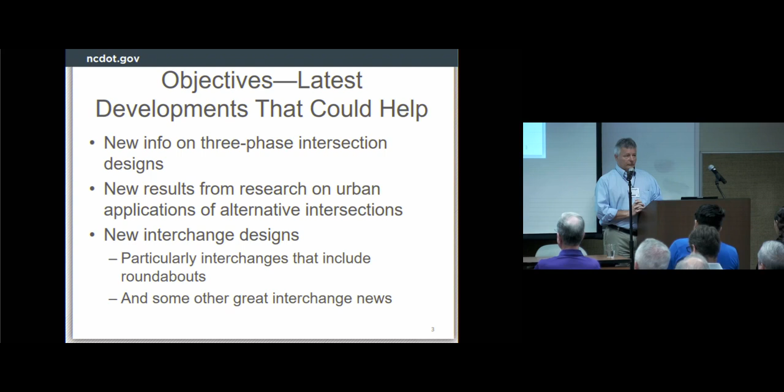And then the third thing to kind of round things out for my time here today is new interchange designs that we keep developing, and some new ones that emerged within the last year that could help us. So that's where we're headed.

So on the business of three-phase intersections, let me be clear, the two-phase is best, right? If we can get the RCI in place, that's almost always the best solution. I say here safety and signal progression, but of course just raw capacity through the intersection. RCI kind of strips out all the other movement, all the other stuff, and gets you down to the essence of that direction meets that direction, and how can we move as many vehicles as possible through a space.

Whatever you call it, goes by many different names, but yeah, RCI is the top of the heap. Median U-turn, a close cousin to the RCI, adds in the outstanding service for pedestrian and bicycle. RCI is, at least on the bicycle side, more debatable, but median U-turn is superb in those aspects, and has shown a terrific safety record too. And then where you really need capacity, you have to stay at grade, but you really need capacity. That CFI, the continuous flow intersection, is there in the menu too.

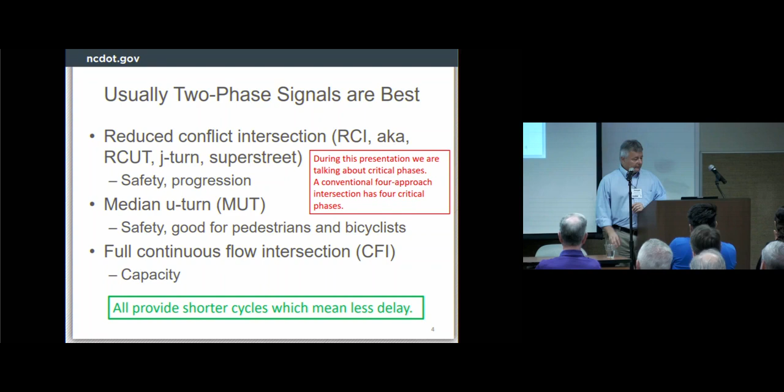So nothing I'm saying here is meant to undercut those kind of three fundamental two-phase designs. Those are the ones that most of us and most of our projects should be striving for. For safety, capacity, pedestrian, other aspects, it's going to be the optimum. But sometimes they just won't let us, right? There's just constraints. And you all have encountered those, and I have too.

The public opinion, the media, yes, our political leaders, just won't let us get that thing, what we consider to be the best thing in place. And then sometimes it's the lack of precedent as well. That median U-turn, we've only got 3 in the state right now. So, most everywhere you're thinking about one, it's going to be the first one in that county. And that's tough. Our RCI, we've got 400 in the state now, so we've got pretty good precedent there. That's not as much the problem anymore. But CFI, we've got a grand total of 1 open in North Carolina. So that is a drawback as well. That hurts us. So sometimes they just won't let us do that thing.

And so we look around for other solutions. Play the good cop, and you know, I even hesitated to put the word compromise on the slide there, but that is kind of what it is. If I was in charge, we'd get the RCI. I'm not in charge, I don't want to be in charge. So, okay, what's the next best thing that'll still accomplish our objectives, and some of these three-phase designs are that. They would fit.

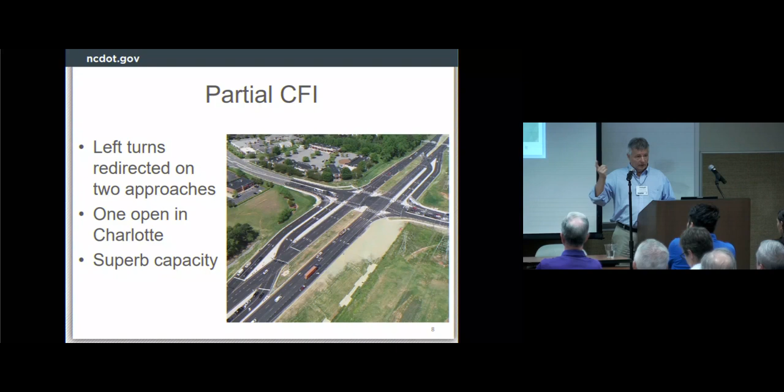So the full CFI version has 4 left-turn crossovers. That's going to be very rare and special, I think - I think there's only one of those in the U.S. Most of them that we'll see will be this partial version with 2 of the crossovers, leading to a signal at the main intersection with then 3 critical signal phases.

And then there's this neat little thing, a combination of a CFI and a median U-turn. Let's call northbound going up the slide here. The northbound lefts get to cross over to the other side of the road like a CFI. The southbound lefts get to come through the intersection and then make a U-turn like a median U-turn design. So we get rid of a phase at the main signal - we're down to three critical phases, and we get to keep all of the impacts on one side of the intersection. That should lead to pretty significant cost and impact savings with traffic movement that's pretty darn close to that previous slide with the partial CFI.

That was a big outcome of the research here, showing that this thing is almost as good from a traffic perspective as the one on the previous slide.

Yeah, we're going to need help from our signing heroes here to get people to drive it correctly. And like the other CFI, there's going to be a possibility of violations and wrong way movements. None of these solutions is perfect, right? But this thing has potential.

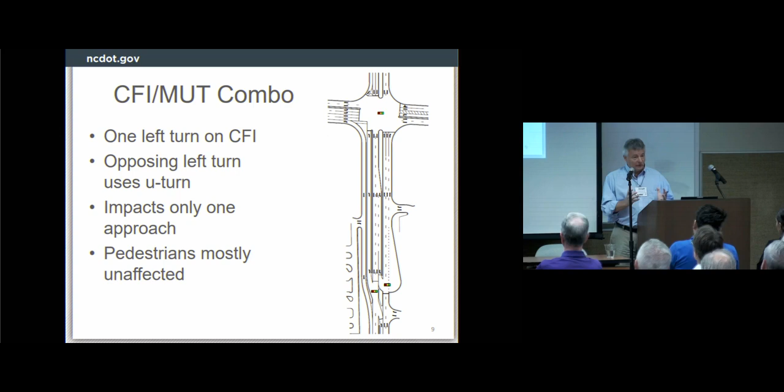We had 2 of these in the planning stages around North Carolina at one time. Both of those projects unfortunately got canceled. So I'm looking for candidates - somebody got a good project out there. This one should be good for pedestrians as well. One of the projects that got canceled was really in a pedestrian-friendly area with so much vehicle demand and pedestrians, and I really thought this one had a chance to help in that situation. So I'm kind of looking around for other places where this could go.

The researchers really liked the idea of the partial median U-turns. There's I think at least 3 different varieties of partial median U-turn - maybe that previous slide, if you call it a 4th one then. The idea here is you're really only redirecting 2 of the left turns instead of all 4. In this case, if the minor street is the north-south street, you're allowing the left turn direct from the minor street, but if you're on the major street and want to make a left turn, you have to go through the main intersection and then U-turn and come back through. So at the main intersection, you're down to a 3-phase signal.

But what they found, especially from their simulations, was there's some circumstances where this thing actually provides you more capacity than the full median U-turn. That circumstance was where the capacity constraint was here. And it's not difficult to find demand patterns, turning movement patterns, where that would be the case, that the capacity constraint with the full median U-turn is actually at the crossover.

If you have one of those, take some demand off of the crossover, and almost like for free, we get extra capacity. Very little extra pavement, really no extra space, and we free up capacity in some of those circumstances.

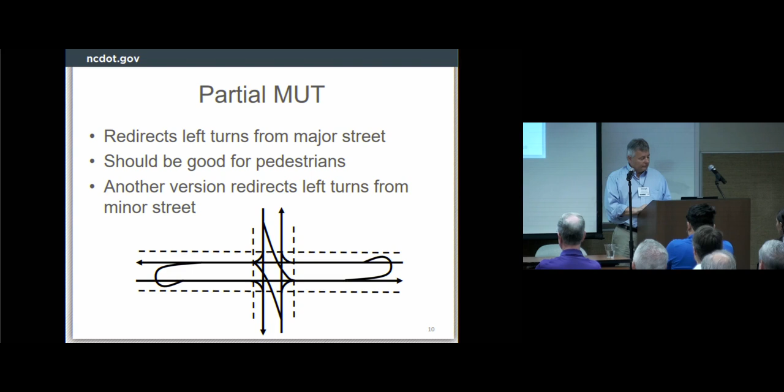Basically the minor, one of the legs of the minor street is right turn only. So we're redirecting the left and through from one of the legs of the minor street.

Interesting. That means I just need one U-turn crossover and one bulb out. My design just got easier by half, right? Because in these RCI median U-turn type of projects, finding room for the crossover and the bulb out is the whole ball game.

Just talking about that over breakfast with one of our colleagues here on one of our projects. Where do we have room for crossover? Where do we have room for bulb out? Well, the problem gets easier if you only need one instead of two.

Like all of these, it's not everywhere. It's, again, a potential compromise. The RCI beats this one in all dimensions, but for a place where they won't let us do the RCI, I think in this particular case it's a developer adding that fourth leg.

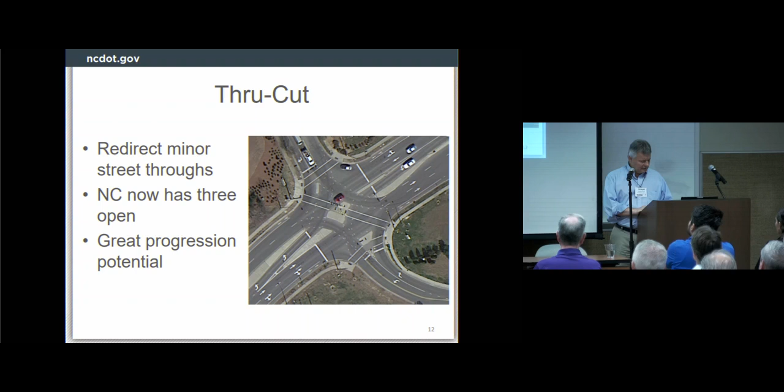So one of the ways to fix that is to offset the two minor street legs. Basically the same operation, the same three-phase signal, but now you got a straight across pedestrian movement. If you do the math on this, it really doesn't save much time for pedestrians, but it sure looks better, doesn't it? And to the extent that we are in the perception business...

I'd rather take this one out to the public meeting. Let's put it that way.

So simulation results that our researchers came up with. You see there are three measures: travel time, queue length, and stops per vehicle. These are averages over many simulation runs, different combinations of demands and such.

The V over C of 0.9 tells you it's a pretty full intersection. We're not simulating 3 a.m. here. This is more like 4 p.m. Typical demands for North Carolina.

Everything beats the conventional. It always will. Get rid of a phase, and that's what you get.

The RCI remains kind of the leader in the clubhouse, but these other designs are pretty darn competitive with RCI in reducing those travel times and queues especially.

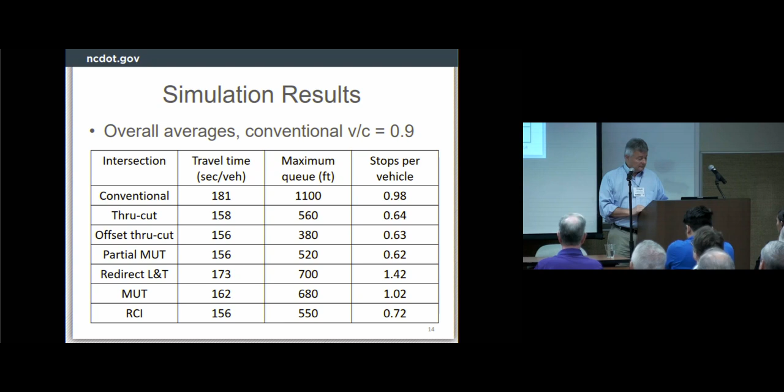More simulation results. These are from a program called SSAM that dives in and analyzes in detail the simulation vehicle trajectories. You can see here rear-end conflicts that they were able to count, lane change conflicts that they were able to count, and we're pretty much beating the conventional with most of these alternatives as well.

So these are definitely surrogates. We need to get some of these built, and we need to measure the crashes and get real crash data.

We do have crash data from a couple of the thru-cut sites. Two of our three in North Carolina have been open long enough, and the crash data look very promising. They're coming in very well.

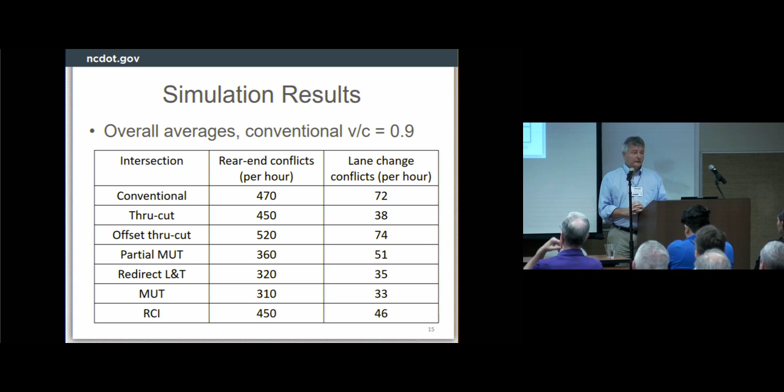We need crash data from some of these other options, but the indications are once we get the safety data that they'll come in like we expect. They'll be safer too.

Okay, and then they ran some case studies. I picked this one out, maybe not representative. This is a terrible intersection, some of you know, in North Raleigh, US 1 Capital Boulevard. The last signal before you get to 540, of course, the signal next to a freeway interchange is always a problem everywhere in the universe, but especially along Capital Boulevard in North Raleigh.

So if we were able to do a project now, the city of Raleigh or MPO or somebody's got a plan to eventually put Capital Boulevard in a trench and remove the intersection altogether. Fantastic. But in the meantime, until that thing gets funded and constructed, if we could somehow get a partial CFI or one of those CFI median U-turn options in place, with the same number of lanes here, you could see we could move traffic a heck of a lot better.

So, you know, maybe as an interim solution in places like this, or as an ultimate solution perhaps, something like a partial CFI or CFI median U-turn combination at a place like this.

Another one that they looked at on the west side of town in Cary, NC 55. I like to pick on NC 55. I think it was the last conventional arterial that NCDOT ever built. The minute it opened, it got over capacity, and you know, it's just a shame. We should have, in my opinion, we should have done better with that kind of last generation of widening projects.

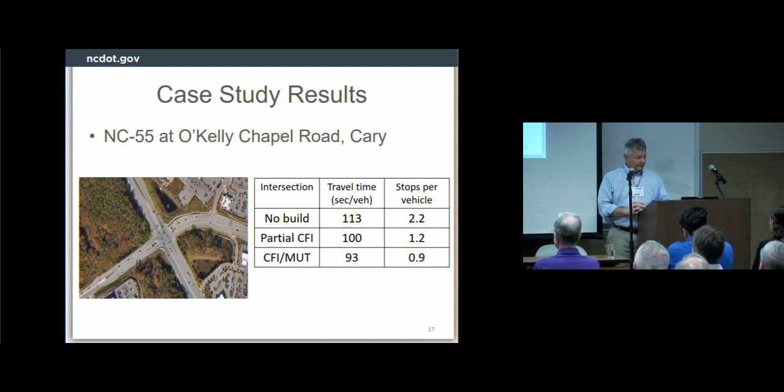Okay, so that's our story on the three-phase intersections. The research report went into a lot more detail, several more variations, but it's good stuff. If you're on a project and get a chance, look for one of those compromises, we have some out there. There's potential. You don't have to settle for the conventional four-phase.

All right, so let's talk about the urban applications a bit. To this point, most of our 400 RCIs around the state are rural and ex-urban. Fantastic. We put them in where we can. We should keep doing that. They've delivered fantastic, especially safety, results.

But the thought has always been there of, hey, maybe, why not? Could we sneak some into urban areas as well? Help our pedestrians, help our signals, get signal progression along our urban arterials. But the twist there that I think we should emphasize more is with progression, you get the chance to control speeds. So there's a safety benefit there that I think we are leaving on the table. We're not pushing that nearly as well as we could be, as we should be. We get safety because of the median, fewer conflicts and chances to get hit, and then lower delays as well. So all kinds of potential good things there if we can get some of these in place.

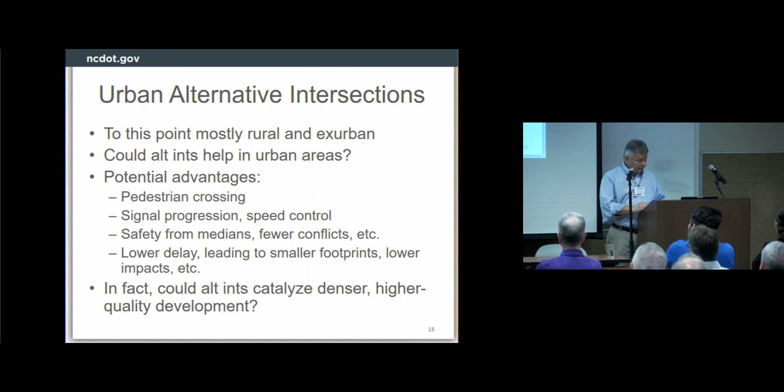The research team, my question to them was, can you help us get some of these in place? They took it further and said, in a more aggressive way, can we use these alternative intersections as a catalyst to reinvent neighborhoods? Especially they were thinking about failing shopping centers and failing malls. You know them out there, I know them out there. We don't have to drive far, like the Kmart just up the street here, right? How do you reinvent places like that? Could our street design actually help us create desirable real estate out of those failing places?

So the project was funded by us, and then NSF actually chipped in as well, which we appreciate. Chris Cunningham was the PI, and they had good help from a couple other co-PIs there. The report is posted on our website by now, so you can easily download it. They did focus groups, they did case studies, they did simulations, and probably, in my opinion, the best thing they did for us, a lot of pretty drawings.

That is not a skill that I have, right? You could tell I work for a public agency by the quality of my graphics. But these guys, they gave us some graphics we'll be able to use, I think, on projects that come out there. Their overall conclusion was the right type of design in the right place could be great, could not only solve our traffic problems, but had a chance to really be a catalyst to build back a failing urban neighborhood.

So they focused on three concepts. A lot of these are pictures from Greenville, which was one of their case studies. I want to emphasize to everybody that Greenville helped us, participated with us, but there's nothing official about any of this. This is not a plan of the city of Greenville or the MPO or anybody else. This is purely research ideas. For instance, at one point we'll show a road going right through their mall. NCDOT is not endorsing the buying and the tearing down of that mall. So let's make that clear.

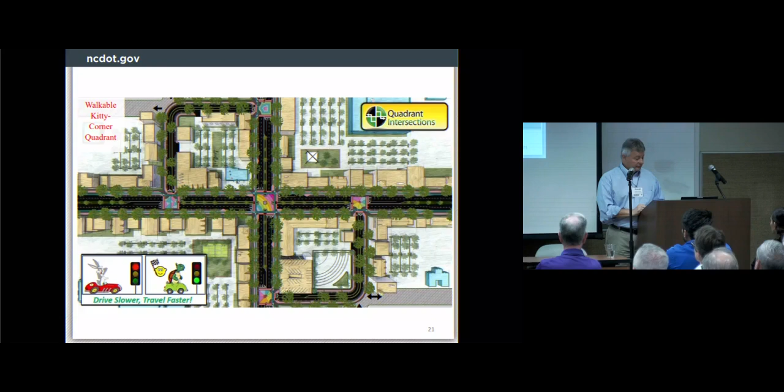If you manage this type of development, you are replacing 350 acres of development that occurs out in the ex-urban areas. And how much extra infrastructure, from our point of view as a public agency, do we not have to provide for that extra 350 acres out there in the suburbs? That, to me, was an eye-opening stat that they provided.

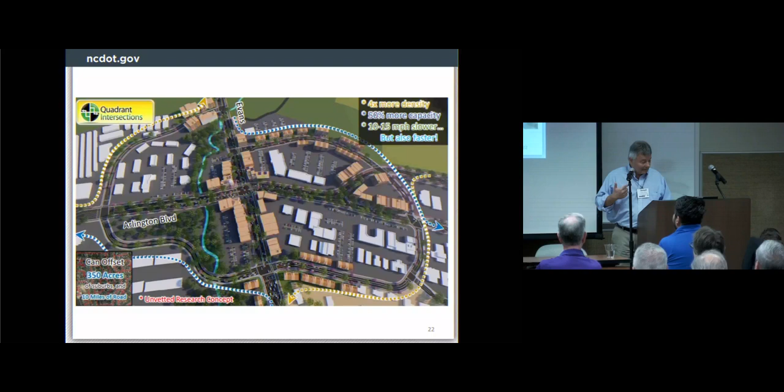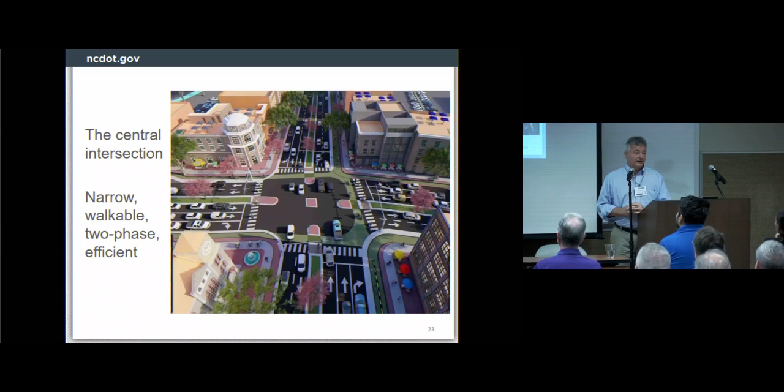I like it. All right, here's another look at that central intersection. Again, get rid of the left turns, walkable, bikeable, and then hopefully the developers notice that and come in behind with some awesome dense development.

Another look at a similar idea here, but this one, instead of the quadrant connectors, you're getting the U-turn ideas. Can you sneak in those bulb outs? They're not really bulb outs anymore. You can see the idea they came up with is sort of widen the median, get your U-turn in place, and then narrow the median back down.

They point out, it was an obvious point, but I'm glad they did it, and we should all keep it in mind: not every crossover has to be 90-foot diameter to accommodate every large truck that shows up, right? You can mix in different types of crossovers, and as long as we provide good enough truck crossovers down the arterial, that will still be okay in that dimension.

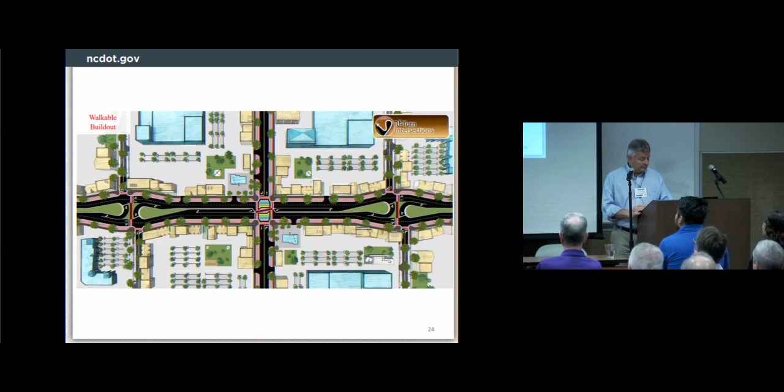So again, Greenville here, I think a different part of the city, offsetting 680 acres of suburban development out in the exurbs. So anybody caring about environmental issues, this should be wave the flag on this one - your runoff, your global warming type of thing. Oh, and by the way, 19 miles of road that we don't have to build out in the suburbs of Greenville. So that's what we're aiming for.

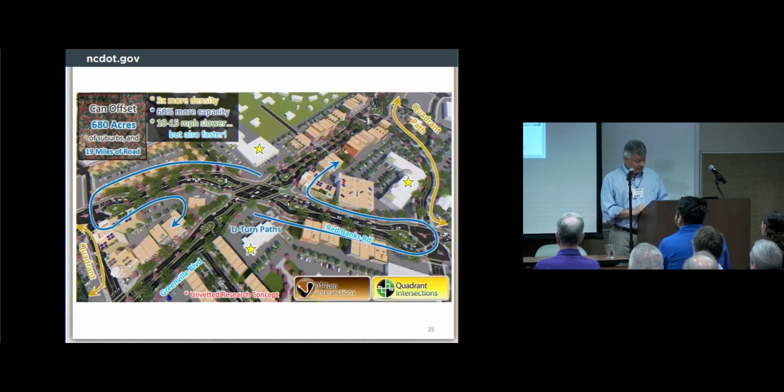Again, these guys went way beyond what I was hoping for with this research. More other looks at what they were working on, what they were envisioning here.

Of course, continuous medians - safer, encourage right-in, right-out from driveways and side streets. On-street parking, that's a luxury. I could have maybe quibbled with them a little bit about that. They thought it was a nice feature. I don't know.

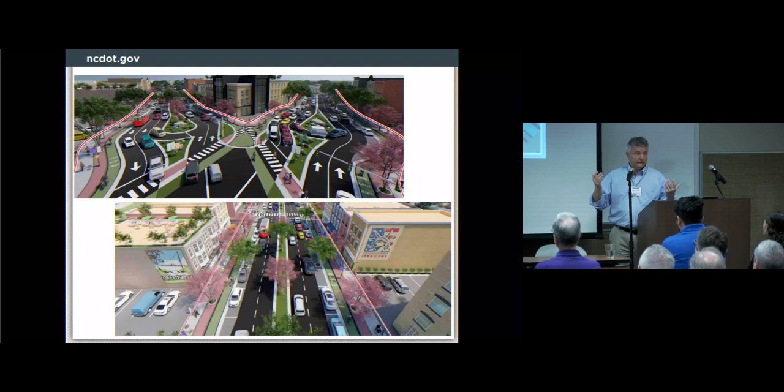Crosswalks everywhere to keep the walkable theme. As long as you got the median in place and you've got good signal progression, a two-stage crosswalk is a freebie. So let's sprinkle them out there everywhere.

And then finally, the one-way, or what other literature calls a split intersection. I think this picture is actually from Smithfield - another case where they were nice enough to work with our researchers, but we're not pretending Smithfield's going to run out and build this tomorrow. The idea is to take one big nasty intersection and split it into two three-phase intersections that operate better and probably safer.

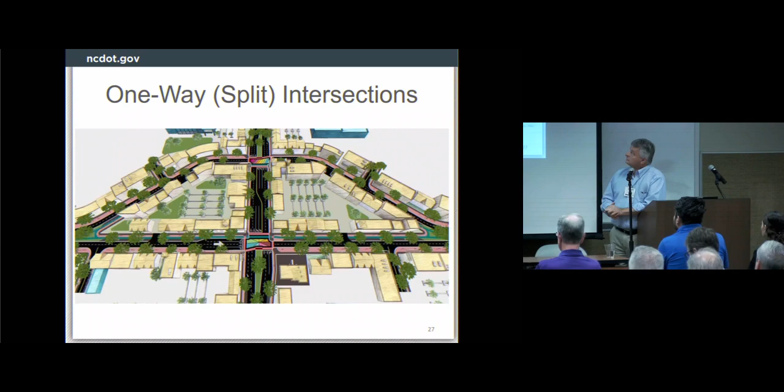One-way streets have a bad reputation in some circles. I think that's mostly undeserved. I think a lot of the cases where we shouldn't have made the conversions, where one-way streets were really not needed, those have by now been reconverted back to two-way. The ones I know of around North Carolina, the one-way streets there are mostly serving a good function for everybody, including pedestrians and bicycles.

One-way streets do not have to be fast. They do not have to be wide, right? In fact, with one-way streets we have that advantage of signal progression, so we can dial it down. Great progression at a 25 mile per hour speed should be a win-win for everybody. Let's take advantage of that where we've got it. These can be narrow streets with slow speed, and three-phase signals, which are at least more efficient than four. So in Smithfield, what's the name of the street through downtown? Market Street.

Market Street today is an undivided 4-lane. We can all agree that's the worst cross-section possible right now. Convert that to a one-way street, free up space - I don't know if we really need that bus lane through Smithfield, but let's imagine. Whatever use we've got for that extra space, let's use it productively - bicycles for sure, sidewalk cafes, etc. Because you just don't need that much pavement to move even more cars than you did before.

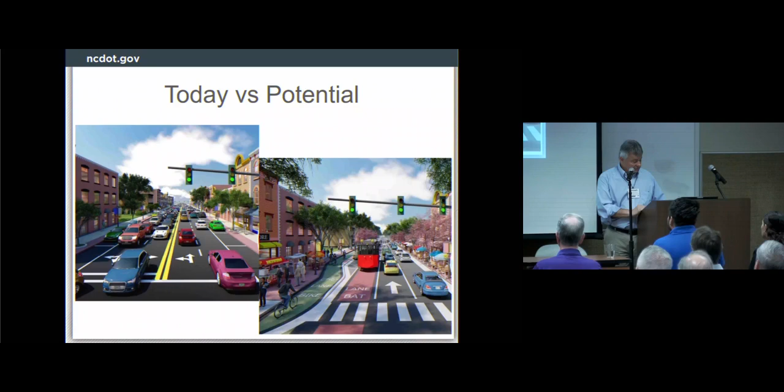So for Smithfield, imagine a sort of new Central Park in the middle of town. That's pretty cool. And in this case, we offset 1,200 acres of suburb - 1,200 acres that can stay planted in corn and tobacco in Johnston County instead of having to sprout houses. So that sounds like a good win.

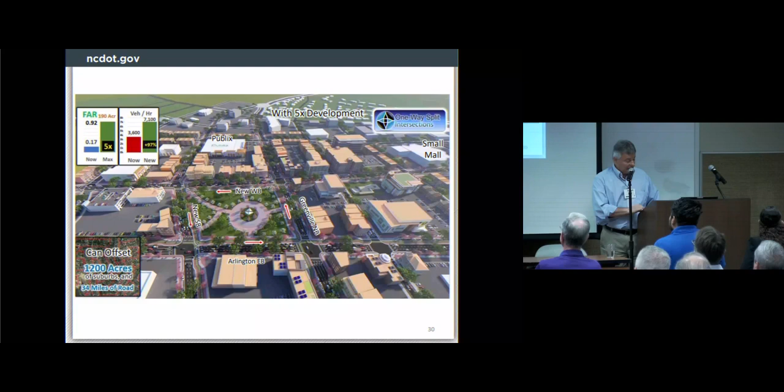Okay, and then my third theme for you this morning is interchanges. These are new ideas that have at least occurred to me in the last year or so since I talked with you last about interchanges.

So again, in Johnston County, this is a cool one out there - a double roundabout that's opened recently on US 64. Fantastic. My prediction is it's going to be awesome. I drove it exactly once, and it looked awesome to me so far. Good for Division 4 - let's do a lot more with that.

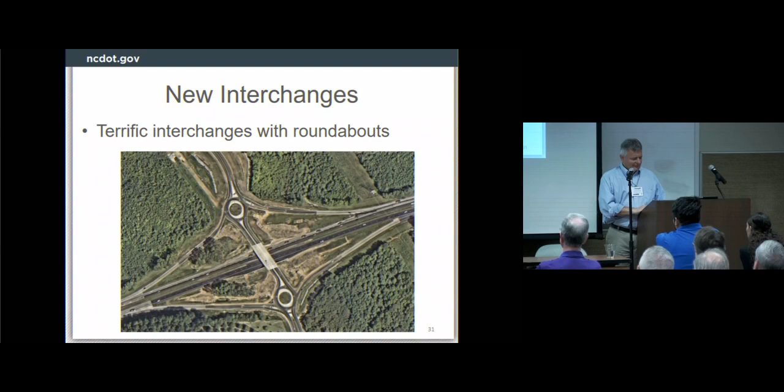And it kind of opens the can a little bit, and the worms are crawling out. It's like, well, roundabouts work well for a diamond - why don't we try roundabouts with other interchange forms? This one is pretty awesome, but let's think a little bit more and extend the idea. So, other interchanges with roundabouts - roundabouts, of course, are awesome, efficient, and not too costly.

We've got great safety data. You can see there the so-called CMF - 0.76 means a 24% reduction in crashes compared to the signal that used to be there. Again, we get speed control, U-turn opportunities, great for pedestrians. They give you that gateway feeling - welcome to town, I think this is Mount Airy. They look good, with all of those benefits as well.

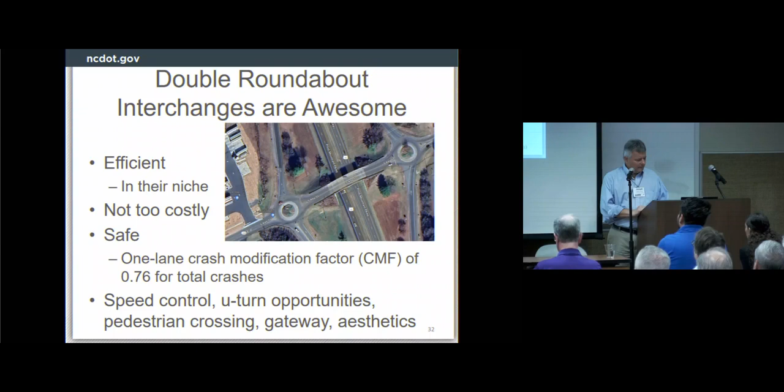So, are there other roundabout interchanges? In fact, how do we know? How do you measure what's a good interchange? I think I presented this last year, so it might be a review. We posted a menu of interchanges and scored them - came up with a scoring system, 12 different criteria, 0 to 5 points on each criteria, so 60 points possible, to make sense of the large menu. There's a website, posted at the congestion management website, with our full menu of interchanges plus the spreadsheet that does the scoring. Turns out it's a huge menu.

There's 10 or so common concepts that most of our interchanges are built that way. And if you look in the literature, there's a couple dozen others that have been published but not built as far as I know. But when we started turning over the rocks - I'm mixing my metaphors here - when we started letting the worms crawl out of the can, turns out there's a lot of worms. Dozens and dozens of new concepts, some of them pretty fanciful, others look like they really could work.

So yeah, 12 categories, 0 to 5 score in each category. It wasn't just Joe doing the scoring - we had a couple of fantastic interns last year, Hayden and Breyer, some of you know, that helped me do the scoring, so it was fair and the quality was checked.

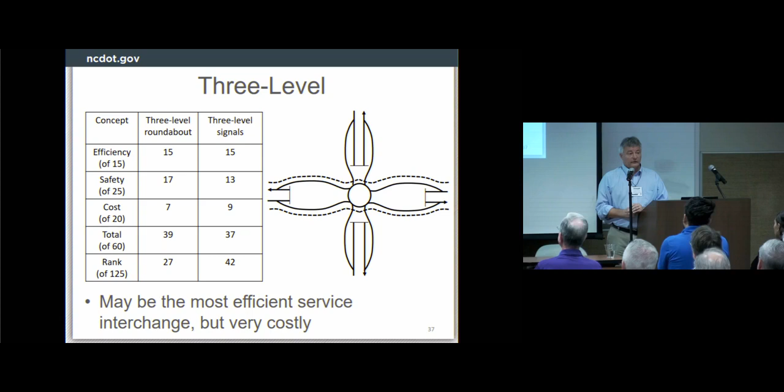And then where we really need capacity, you have to go to the third level: freeway under, arterial through over, and then roundabout at grade in the middle level that handles all the turns. 27th ranked out of 125, so pretty good, very costly, but scores 15 out of 15 in efficiency. So it moves traffic as well as you can at a service interchange.

This one I noticed in Minnesota, Duluth, of all places. Who knew they had traffic up there, but there it is. Somehow they needed this, and it's a good-looking interchange. Again, anybody with a SPUI in mind—why do you need to put that huge bridge right over the freeway? Move your junction over to the side, one side or the other, wherever you've got a little bit more available space, and you can use a roundabout like this, or just signalize it.

And all of a sudden you probably reduce your SPUI costs greatly, and the operation stays the same. Yeah, those other 2 bridges, but those are small ones—single-lane bridges. So the offset idea, here you can see 12th ranked out of 125. If you have to signalize it, that's still not too bad, 50th out of 125. Again, to compete with the SPUI in places where you've got quite a few left turns, this is an elegant way to handle them.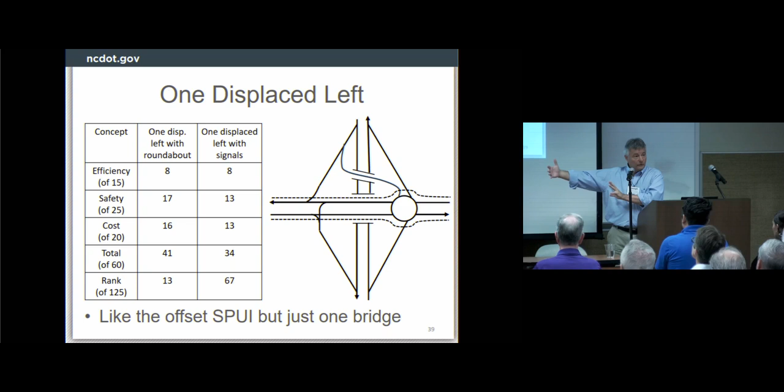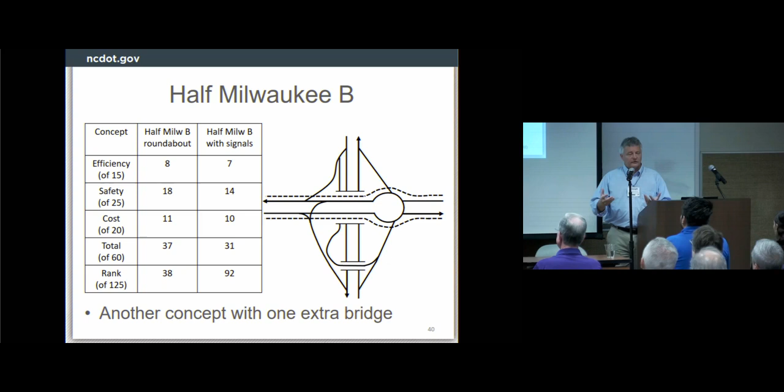This also seems to be a tough competitor, especially in cases where you've got a little bit more available space on one side of the interchange than the other. And then basically the same idea, except do the mirror image, putting that extra bridge on the other side. We call that a Milwaukee left turn because that seems to be where it was invented, in Milwaukee, Wisconsin. Good for them—they've got a couple of these up there, seem to work well. This one came in at 38th ranked. Again, it's starting to depend on where you have the available right-of-way, where your constraints are, utilities, drainage, all that stuff that we look at.

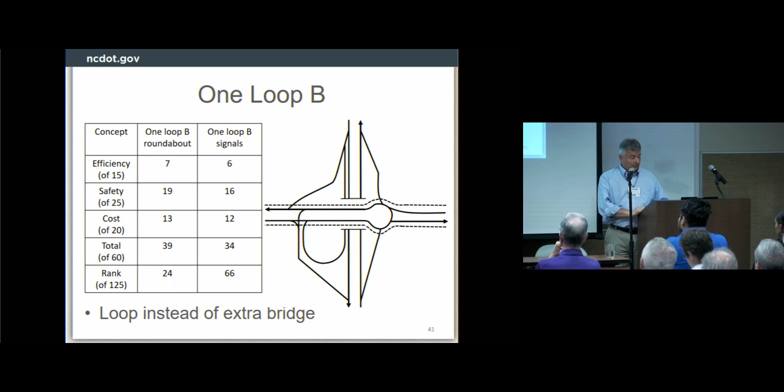And then one more variation on that Milwaukee left turn was basically a loop that went over the freeway. Take that and put the loop back on the correct place where it belongs, and this thing looks like it competes pretty well too. One advantage of this one is you can move the roundabout closer to the freeway. If you've got really tight constraints on that side of the interchange, you can move things closer here. You'll have enough space because of the loop on the other side. So ranked 24, that's also pretty competitive in some spots.

Yeah, and then there's this, right? Parclo AB. I know we've got lots of those on the ground, and we've got more coming in our projects. Parclo AB is simply the worst way that's ever been invented to move traffic through space on the Earth's surface.

All right, did you catch that? The worst ever invented. It scores a whopping 2 points out of 15 as far as efficiency. Two big signals at the wrong spacing, so you can't progress. You're making everybody drive all kinds of extra distances, all kinds of left turns. I point you to Falls of the Neuse at 540 in North Raleigh, if you want an example of the glories of the Parclo AB.

One of the worst things about Parclo AB is the wrong way potential. You've probably driven out of the airport at Lumley Road at 540. I have. I specialize in interchanges, and I'm coming out of the airport, but it's always late, and it's raining, and it's dark, and I come close to making a wrong way movement, trying to find the ramp terminal to get in the correct way to go on 540.

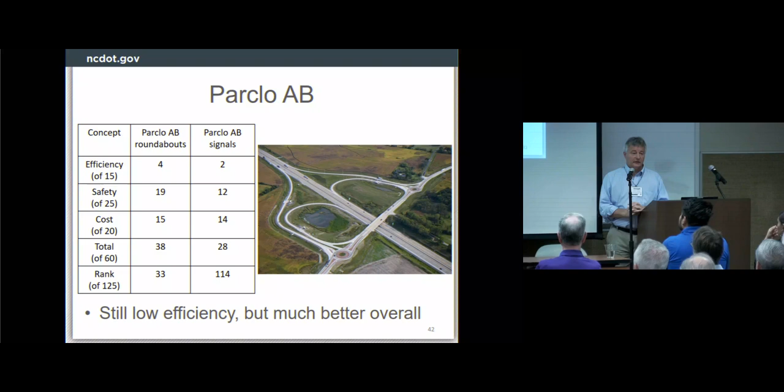Okay, those are the problems. The solution is roundabouts, like this lovely little thing in Illinois. It moves you from the overall Parclo AB with signals, ranked 114th out of 125. Not much to like there. It moves it to be at least 33rd ranked. It helps the cost situation a little bit, helps the efficiency situation a little bit, but especially helps the safety. A lot of that is the wrong way potential that you just removed.

Okay, Mike Lindgren in the room? Mike wanted me to throw in this slide. You know Mike? Mike is on a warpath against weaving areas, rightfully so. So while we're thinking about interchanges, this is Poole Road in the I-87 area on 440. Terrible weaving area, and he sees other ones like this being created in other projects.

So sometimes weaving areas are necessary, but you should be aware if you've got one of these on your project that there is really no good way to analyze traffic in a weaving area. Simulation does pretty well, but even that has to be calibrated. As far as macroscopic methods, there's a new method out there that seems to have made things worse as far as the analysis goes.

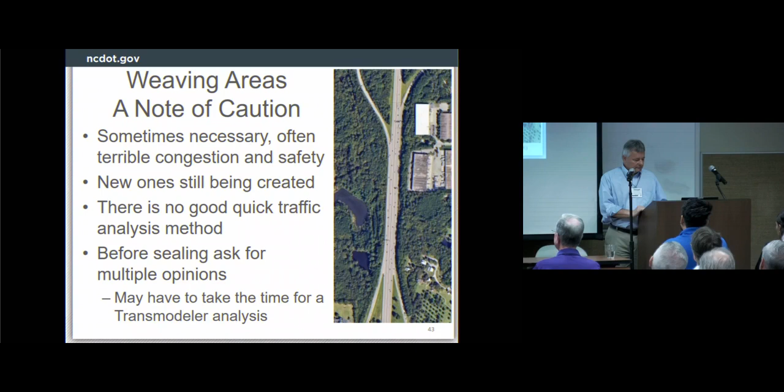So these are tough situations. The best advice Mike has, that I'm endorsing here, is if you've got a weaving area in your project, ask for multiple opinions before you endorse it and move it along. Before you create another Poole Road situation, we can't afford more like that. Unfortunately, in a crowded area, these are necessary, but we all need to do better. So when you see Mike, tell him I did my job here.

All right, I'm going to wrap up with just a couple other thoughts. Some really good interchange news, great interchange news: two new designs from your friends at NCDOT. This one here is the world's first superstreet interchange. It's basically an RCI, but when I published it a few years ago, we didn't have the RCI name, so I named it superstreet.

Sorry about that. US 64 at I-85 was a diamond that was really unsafe, lots of crashes. It's always the left turns—people making a left turn out from the end of the ramp terminal. High speeds on US 64 didn't help. So basically we turned it into an RCI, prohibited that left out move, made it right turn only. At the end of the ramp, they go down a ways, find a place to make a U-turn, and come back through. It's been open a few weeks.

Anybody been through it yet? You like it? Is it working? Okay, thank you—not exactly a rousing endorsement, but maybe you didn't know it was the first in the world when you drove through it, right? And I have not been through it yet either. I'm looking forward to it.

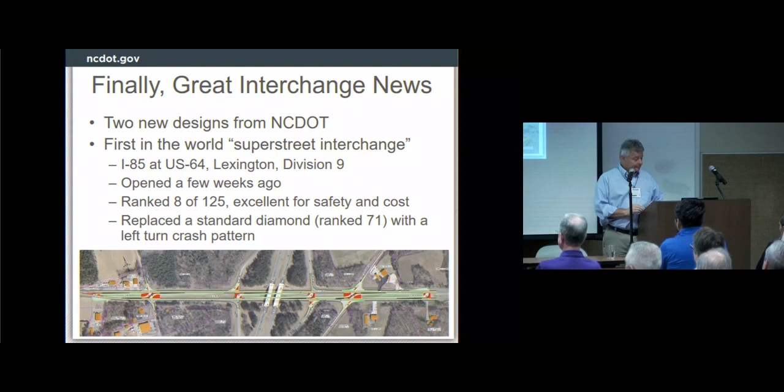Then there's the other one that is very close here, and you should definitely drive through it on your way out if you haven't seen it already. This will be the second in the world, as far as we know, the over-under design at I-440 and Wade Avenue, just a couple miles from here. It's so pretty. You can go to Paris and look at the Mona Lisa, there's statues, there's fountains — I don't know, but to me this is artistic as well as functional.

It ranks 59 out of 125 on our scoring system, so it's got some drawbacks, but it fits that spot so perfectly. I worked on this spot and didn't think of this — credit to the design-build team that came up with it, and again to our management and leadership that let them do it, that gave them the space. It fits a design that works that well and moves that much traffic in such a small space, without disturbing NC State on one side, Meredith College on the other, too much, and the pedestrian bridge over at the top there.

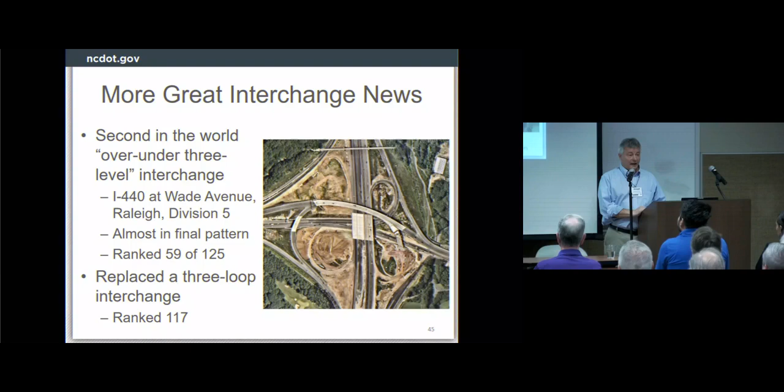So it's just awesome, and let's do more like this. Not all of ours will be as pretty as this one, but the thing it replaced, the three-loop old interchange, was 117 out of 125, so that clearly needed to go. A very nice improvement. When it opens fully, I expect it to work really well. We'll get the numbers, we'll see.

So in summary, three themes that I had for you today. The first one was: two-phase intersections are still the gold standard. RCI, median U-turn, CFI — we should all be trying for those wherever we can throughout the network. But where they don't fit, or they're too costly, or they won't let us, then the three-phase solutions are potential compromises. They're on the menu. They're going to deliver most of the benefits of the two-phase — safety, efficiency, etc. So just be aware of that. It's a big menu. Don't settle too much, don't compromise too much — we don't have to go all the way to a do-nothing option on these projects.

Second point I had was that alternative intersections can really be the linchpin of a sort of urban renewal. Greenville and Smithfield are lovely places, but they've got problems like everywhere else, with failing retail, big boxes and malls, and places that need to be fixed, and our road projects can help do that, right? With the right kind of alternative design that moves lots of traffic, lots of capacity, at slow speed, but walkable intersections — that seems to be a win-win-win combination that could lead to a kind of rebirth of a whole failing area. And then third, on interchanges, again it's such a big wide menu.